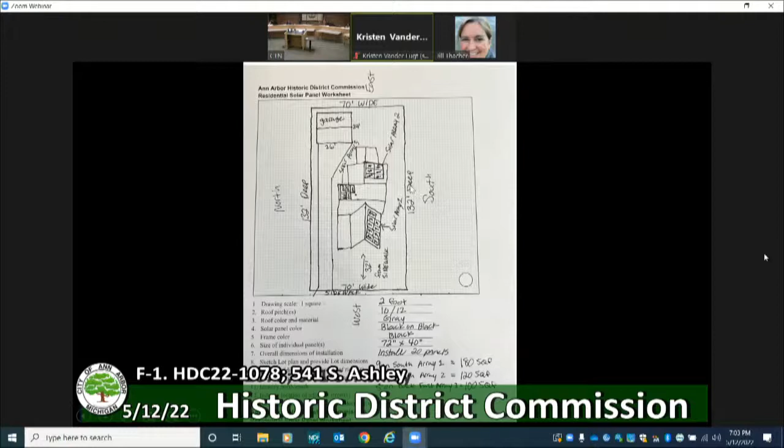Another one is on this shorter sloping roof that we see in the back here. Here's a diagram - that's the shorter one in the back. And then there's a 3rd section on this roof that sheds toward the rear of the yard. They are black-on-black panels, 20 of them total. This is a pretty straightforward application.

From the Secretary of the Interior's standards, number 2 says that the historic character of a property will be retained and preserved. The removal of distinctive materials or alteration of features, spaces, and spatial relationships that characterize a property will be avoided. Number 9 says new additions, exterior alterations, or related new construction shall not destroy historic materials that characterize the property. The new work shall be differentiated from the old and shall be compatible with the massing, size, scale, and architectural features to protect the historic integrity of the property and its environment.

Number 10 says new additions and adjacent or related new construction will be undertaken in such a manner that if removed in the future, the essential form and integrity of the historic property will be unimpaired.

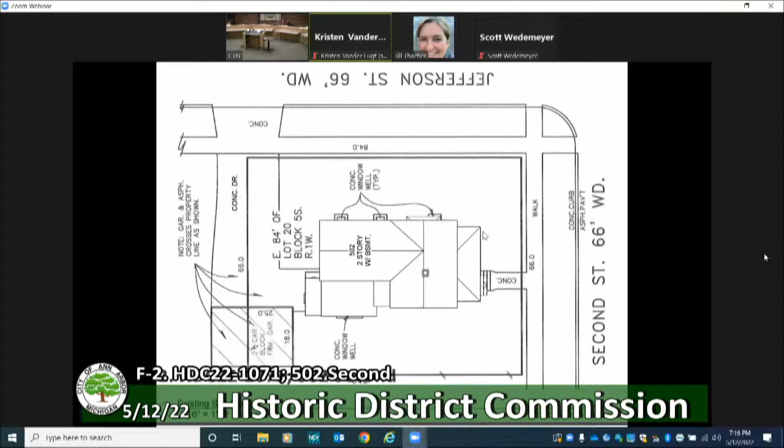That's the existing site plan. The garage is over here. This is where the addition is going to go. There it is.

Existing first floor plan, that will remain unchanged. Here's the existing second floor plan right now. You see that the second floor cuts in here. This is the roof of the one-story wing below.

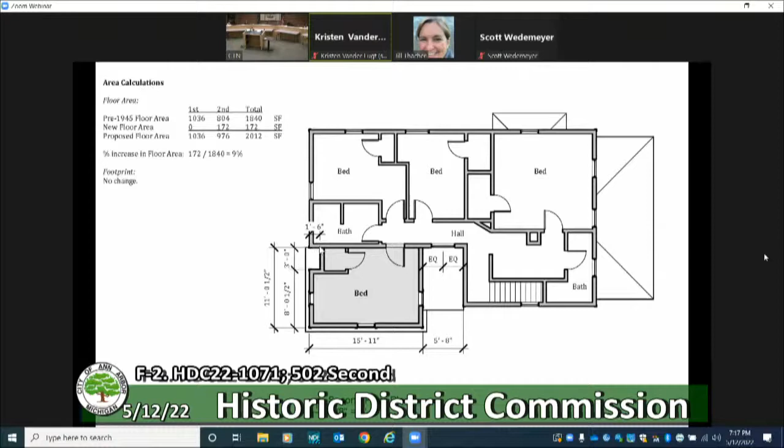And here it is with the addition sitting on top of that one-story wing. Here's that notch I pointed out a minute ago in the rendering that keeps this corner distinct, and it is set in 1.5 feet. Existing roof plan, proposed roof plan on the right, matching the slope of the south gable.

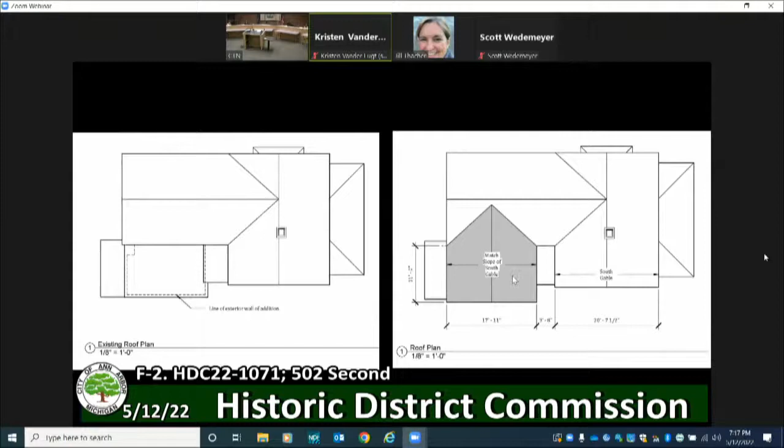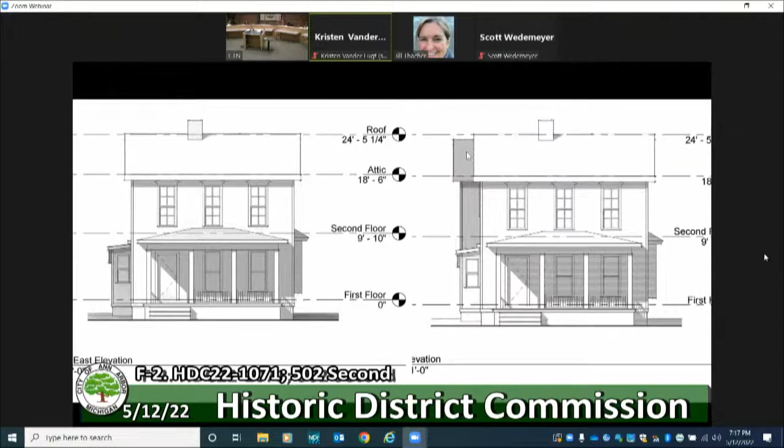Existing on the left, proposed on the right, this piece here is the addition. On the north side, you won't see any changes. On the west side, or rear, here's the addition. It ties in just below the ridge, and is shorter than the highest ridge on the two-story portion of the house right now.

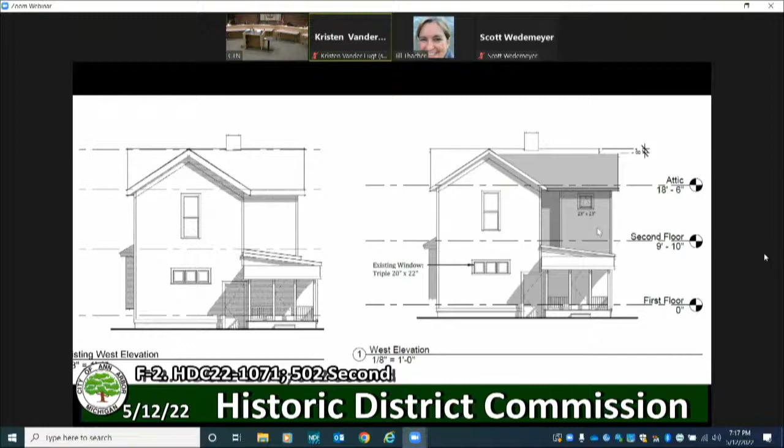And here are those windows. This one's 30 by 60, this one's 32 by 59. Very close, but not an exact match. Here's that historic window that's getting slid over to be centered on the remaining space here.

And the trim that will remain, the roof overhang. There's a lot more information here on materials. This is new, and it's mostly - I can always go back up to this if you want - but it's matching very closely.

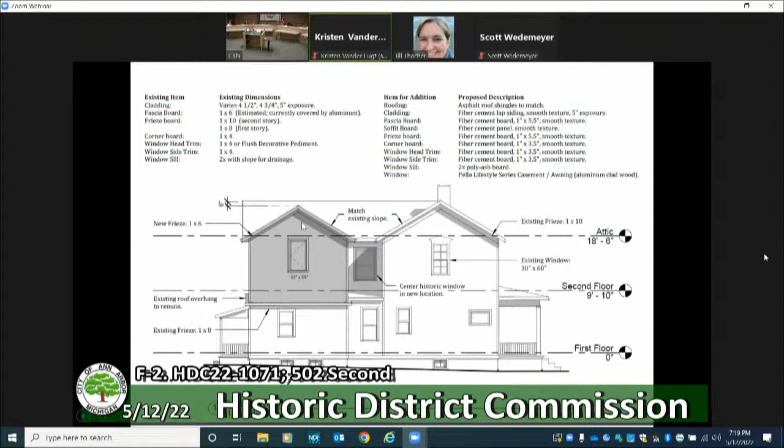Let's see, I want to check and see if these are really matching exactly, or if the fascia is 1 by 6. The new fascia will be 1 by 5.5. Frieze board on the second story is 1 by 10, 1 by 8 on the first story. Frieze will be 1 by 5.5 on the addition. So the dimensions of the trim are shrunk a little bit, which is appreciated because that'll help distinguish it, but it will still be very compatible.

This is a cutaway of the portion of the addition that you can't really see that's in that notch.

I've already read to you numbers 1, 2, 5, 9, and 10. So the Secretary of Interior's guidelines for additions recommend constructing a new addition so that there's the least possible loss of historic materials, so that character-defining features are not obscured, damaged, or destroyed, and considering the attached exterior addition in terms of the new use and the appearance of other buildings in the historic district or neighborhood. Design for the new work may be contemporary or reference design motifs from the historic building.

It's recommended to locate the attached exterior addition at the rear or on an inconspicuous side of a historic building, and limit its size and scale in relationship to the historic building. Also, designing new additions in a manner that makes clear what's historic and what is new. It's not recommended to lose character-defining features or design a new addition so that its size and scale are out of proportion, thus diminishing the historic character.

It's appropriate to place a new addition on a non-character-defining or inconspicuous elevation and limit the size and scale in relationship to the historic property. These are from the Ann Arbor Historic District Design Guidelines. And to place new walls in a different plane from the historic structure, in a subordinate position to the historic fabric.

It's appropriate to limit the size and scale of the addition in relationship to the historic building so it does not diminish or visually overpower the building or the district. The addition's footprint should exceed neither half of the original building's footprint nor half of the original building's total floor area, and I have that in the staff findings. The total increase in floor area is 9%, and in the footprint is 0%. It's not appropriate to design an addition that overpowers or dramatically alters the original building through size or height.

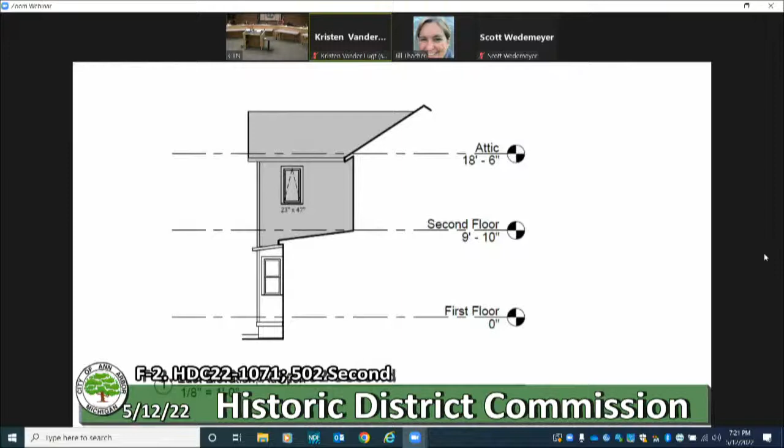All right, let's see. There is one small 1/1 window that would be removed as a result of this.

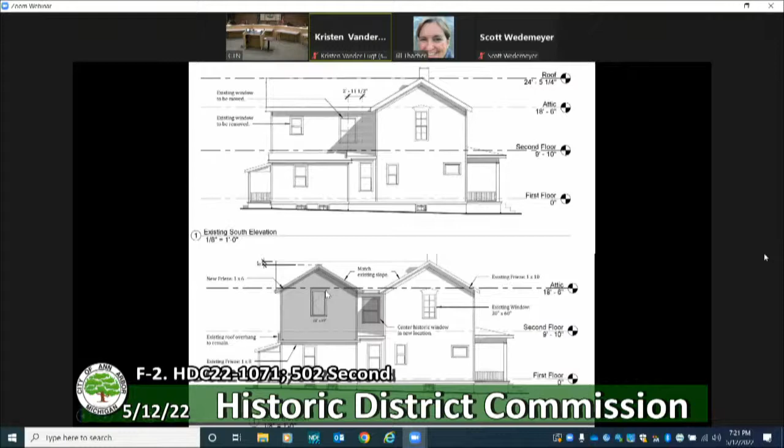In my staff report, I had mentioned that there wasn't a lot of differentiation in the trim and the window sizes. But now that that has been addressed in these new drawings, staff does recommend approval of the application and believes it meets all of the Secretary of the Interior standards and guidelines and the Ann Arbor Historic District Design Guidelines. Thank you.

Commissioner Ross and myself were on the review committee. Commissioner Ross, would you like to give your report?

Certainly, thank you. So just to start off, generally speaking, the house is at an intersection at 2nd and Jefferson. So it's in a highly visible location, but due to the placement and scale of the addition, even though it sits at an intersection, it'll be fairly well concealed.

So we did a walkthrough of the house, talking with the architect and the homeowner. Everything, in my opinion, seemed to make sense in terms of meeting the standards. It's appropriately scaled, and it's in a really good location. The materiality is fine.

Just the one question we had with the original proposal is that the design should make at least a few nods so it's clear this is actually an addition versus an original part of the house, because the siding on the addition is going to be Hardie, and the siding on the home is going to be Hardie as well, so it's going to be all clad in one material.

So generally speaking, the addition was designed so well to fit in that there were some initial questions in the field around how we'd be able to tell that this is actually an addition. It sounds like the architect, after that discussion, made a few tweaks to the design, mostly to the trim and the operation of the windows, and added that little notch to differentiate the addition as new. In my opinion, I think it meets the standards.

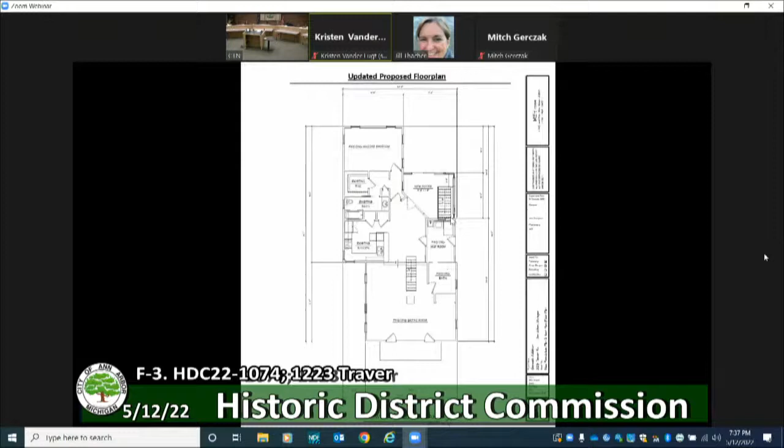Here's the existing notch. This is the existing floor plan. This is the proposed without this wall being inset. I think it was 6 inches or a foot on the original application.

Existing east elevation proposed, you see that the foundation is higher. Here it's very low to the ground. Here it's up 16 inches.

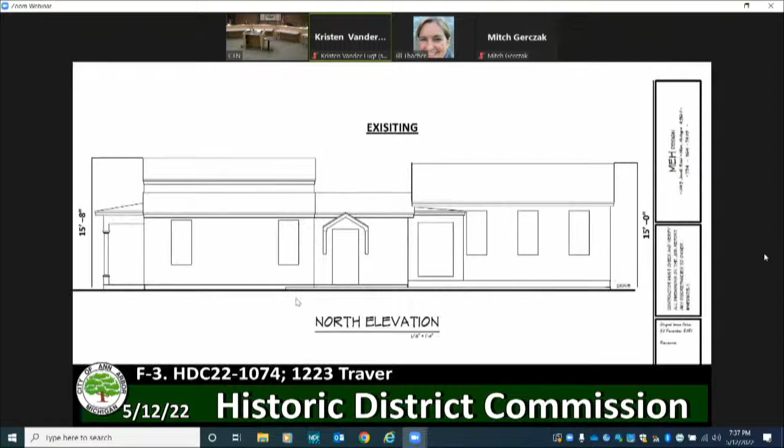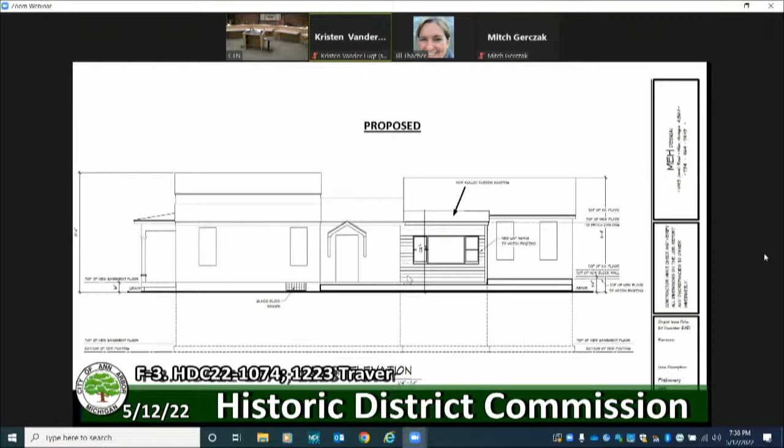Here's the existing north elevation. And here's the proposal. There would still be some differentiation between the roof lines here because this addition is really just a square, and though this wall plane would be the same, there would no longer be a notch here. There would be differentiation in the roof style and height.

This is the back of the house. This is what it would look like from the back. South elevation, there are no changes.

So let me go through the standards, and then I think I have some comments for you. Number 1 says that a property will be used as it was historically or be given a new use that requires minimal change to its distinctive materials, features, spaces, and spatial relationships. I have already read 2, 9, and 10 to you.

Let's see, so from the Secretary of Interior's guidelines, it's recommended to design new additions in a manner that makes clear what is historic and what is new.

From the guidelines for building site, it's recommended to retain the historic relationship between buildings, landscape features, and open space, and to preserve important landscape features, including ongoing maintenance of historic plant material. Also not recommended is locating new construction on the building site where important landscape features will be damaged or destroyed.

From the guidelines for district or neighborhood setting, this is very similar. It's recommended to retain the historic relationship between buildings and landscape features of the setting.

From the Ann Arbor Historic District Design Guidelines for additions, it's appropriate to locate a required addition on the least character-defining elevation, keeping it subordinate, and designing an addition that makes it clear what is historic and what is new. From the Ann Arbor guidelines for landscape features, it's appropriate to retain and maintain mature trees, hedges, and other historic plantings, and to retain the historic relationship between buildings.

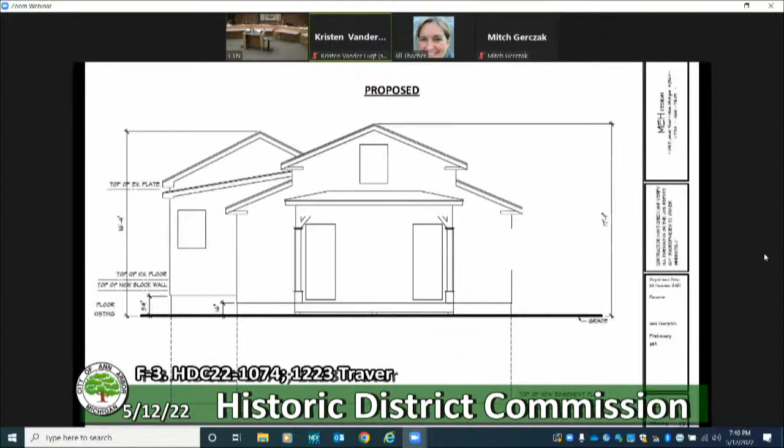One of my staff findings was that if the decision had to be made between moving the house or losing the trees, that would be tough, because it's pretty clear that neither moving the house nor losing the trees is recommended in the guidelines.

The applicants do say that it's possible to leave a crawl space under that portion of the house where the tree's roots have already crept underneath the rear wing. This isn't ideal for them because they're going to lose basement space, and the whole point of this was to get a larger finished basement out of the work that they want to do.

But leaving a partial crawl space along that south wall would leave the tree roots undisturbed, and would be in keeping with both the standards and both sets of guidelines.

For the revision to the addition, I'm a little bit wishy-washy about this one, because you can kind of see it a couple of different ways. This addition that you see in the back here was from the period of significance. The new addition that was inset a little bit is in roughly the same footprint as that, so that is something I think should be maintained.

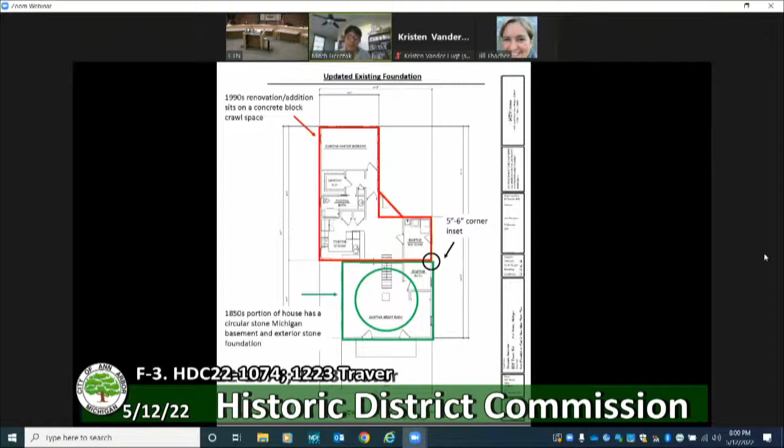Thank you, I had the same question actually, that's the first thing I thought of. That might be tricky for a number of reasons - I don't know if you can tell that we have some stairs, grandfather stairs that connect the old portion and the new portion. Yeah, it'd be quite a... that might be more than we could afford.

I think I'm good. You're all good? Okay.

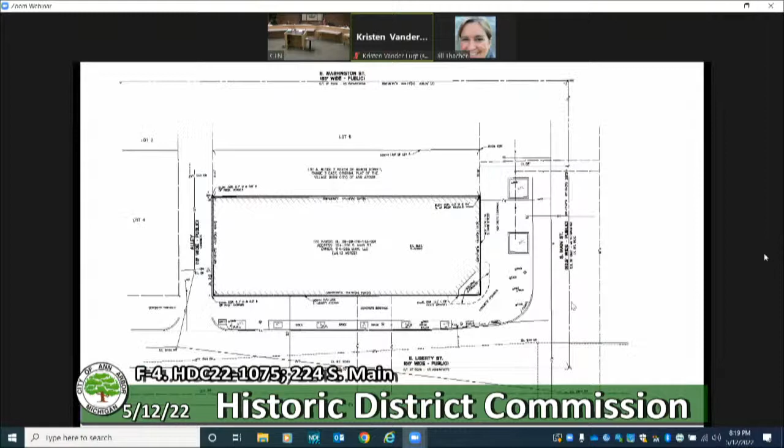These openings are maintained, as are the openings in the front and the front doors and the trim there. Site plan is a rectangle.

That's pretty straightforward. Existing first floor plans, I'm not going to dwell on the floor plans, but they're here if we need to talk to them. There's a stairwell and an elevator proposed

to be placed inside of the Main Street storefront, which has been revised. I'll show you that in a second. And then we have our second and third floors and the fourth floor here, which is the partial floor.

And then it looks like there's a mechanical screen on top of that with some mechanical units. We have elevation drawings. Here's 224 South Main Street, which has a new storefront in it.

All of this remains, and panels would be replaced here. And then overhead, we have the new building and glazing, and here you can see that fourth floor that's set back.

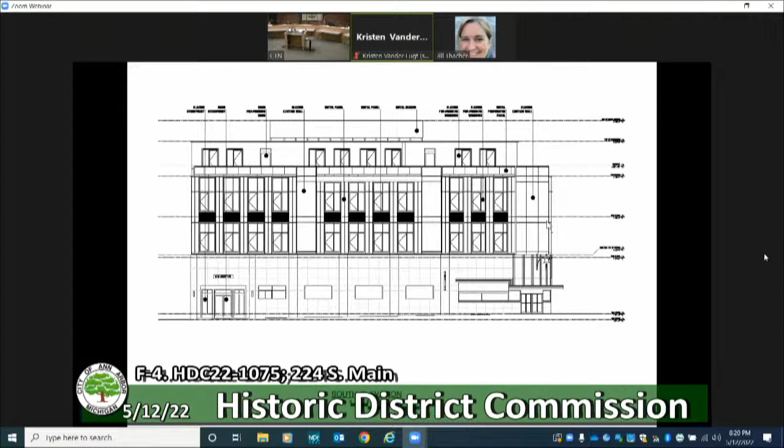The south elevation and the view from the back from the alley, which you actually wouldn't see because there are buildings in the way, but you might get a little bit of this on an angle. Existing materials have been laid out very nicely in the application, and proposed materials include the steel panels.

This is the new storefront on Liberty, and we have a new storefront on Main at 224. There's information on the metal panels and window frames.

Here's the metal cladding plan for the first floor for the Cunningham section. They, in some detail, drew over the historic photographs to figure out what the panel pattern would be, and then to replicate it with modern panels.

Obviously, it's going to be a little bit different around these windows, but really, that alone would just do wonders to restore the historic appearance of this building.

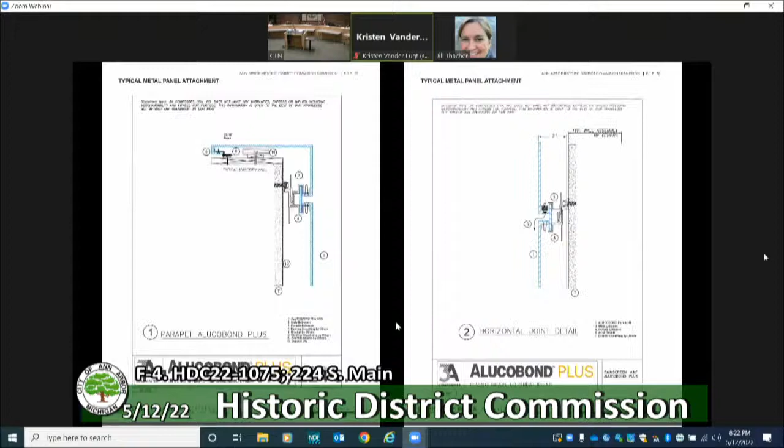There's a lot of information on attachments of panels. We're not going to go through in detail, but I can flip back to them if you want to see them.

Here we have the new storefront on Liberty that is proposed, and the new storefront on Main Street that is proposed. I touched on this earlier, but since this is a contributing architectural feature from the period of significance, I don't

think that it is appropriate to replace this storefront with a shallower one. I realize that this is very deep and takes up a lot of floor area on the inside, but that is the historic character, to have these very large 40s display windows.

There aren't a whole lot of these left on Main Street. I can only think of two. Window cut sheets were included.

All right, let me run through the standards and guidelines. I read to you 1, 2, I didn't read 3. Each property will be recognized as a physical record of its time, place, and use. Changes that create a false sense of historical development, such as adding conjectural features or elements from other historic properties, will not be undertaken. 4 says that changes to a property that have acquired historic significance in their own right

will be retained and preserved. I have read to you 5. 6 says deteriorated historic features will be repaired rather than replaced.

Where the severity of deterioration requires replacement of a distinctive feature, the new feature will match the old in design, color, texture, and where possible, materials. Replacement of missing features will be substantiated by documentary and physical evidence. And I have read 9 and 10 to you.

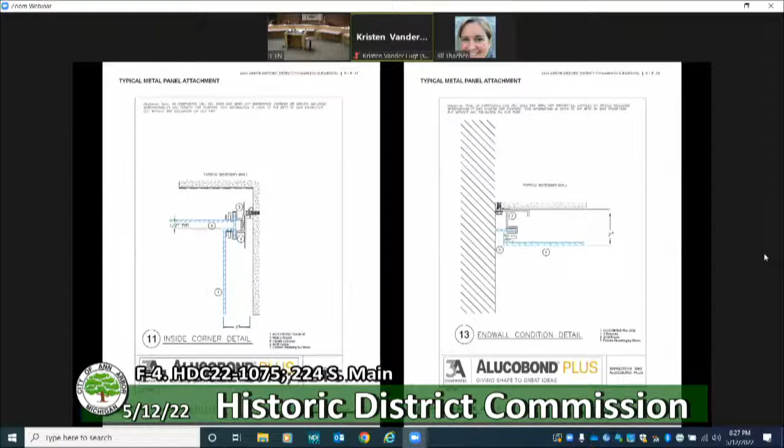Let me cruise all the way back up here again. Okay, yeah, these are good.

Just to be clear, the one-story building on the site now is from the period of significance for Ann Arbor's historic districts, and it does retain its integrity from that time. It's therefore a contributing historic structure, and its character, materials, and architectural features must be maintained. It's a unique example of art moderne architecture in Ann Arbor, of which there are few remaining examples.

No changes are proposed to the corner storefront and main entry, which is appreciated. No changes are proposed to the footprint of the building. The current floor area is 5,304 square feet, and the proposed floor area is 13,500, an increase in floor area of 254%. I've already gone through the Preservation Brief 14 information.

So while the work to the exterior of the historic building is commendable, staff believes the building addition and the replacement storefront at 224 South Main are incompatible with the existing building, based on the Secretary of the Interior standards and guidelines and guidance offered by the National Park Service in Preservation Brief 14 for additions. Thank you.

Thank you, Ms. Thatcher. Commissioners Ross and myself were on the review committee. Commissioner Ross, did you want to start, or do you want me to? Certainly, thank you. So, yeah, I basically agree with the staff report.

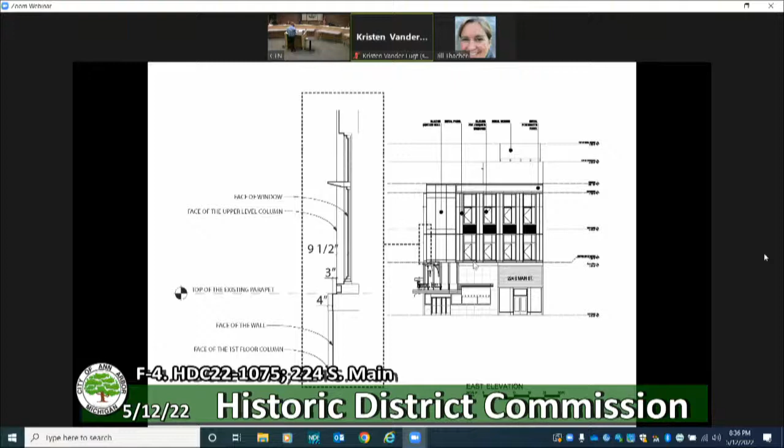The second floor plane will be constructed above the existing roof, and above the original second floor that the current roof is constructed above. So the building would be able to be removed and restore the height and scale to this one-story portion in the future, without compromising anything whatsoever.

Yeah, I don't know. I think that might be the extent of what I wanted to point out based on the staff report, and I'm here to answer any questions.

I did see in the staff report a question about how we're going to adhere the panels to the brick, and if we would go into the mortar joints. We would go into the mortar joints. We've attached furring strips into those mortar joints to preserve the brick faces and then apply the metal panel to those furring strips.

So I'm here to answer more questions. Do I sit down now? Do I stand up? You can stay there.

Let me get my notes, okay, I have a few questions here, David. But I guess just the first one, can you explain the program, if it's known, of what people will be accessing in the Liberty storefront and then also the Main Street storefront?

The Main Street storefront is currently planned to be the access for the upper stories, whether those be commercial or residential. We are looking at the two full floors as commercial and potentially that upper fourth floor as partial residential that would have access to the roof. The elevator would allow the businesses or commercial uses to also have a private patio space up there.

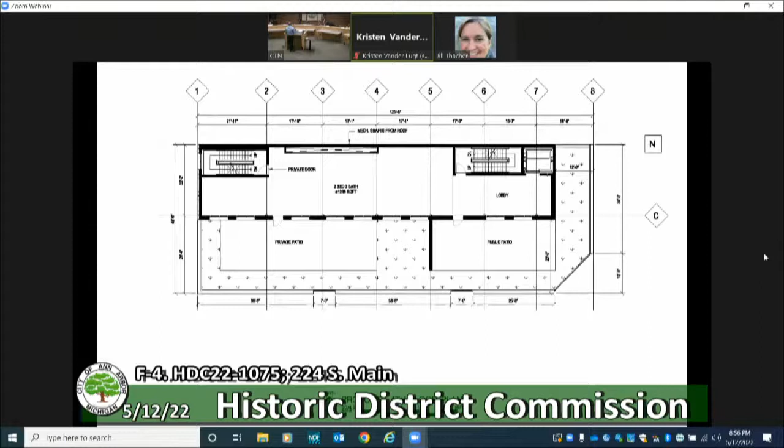If I can just ask for some clarification - you're referring to working session 3? Yeah, because I believe, and I was not present for one of the working sessions, I had a prior engagement, so another person from my office was here at that presentation, but the request was made from the planning, or from the HDC Commission, to restore the 45 that we had shown from working session 2. So that was, I think it was a question about why it was like that, and in the other one, maybe it was more compatible or not, but I think it was a question about why there was a change.

And for me, I think that angle, the way it's depicted today on the proposed design, is competing a little bit more, especially reading in the full plane. Okay, and maybe it's just that view that was chosen to be displayed.

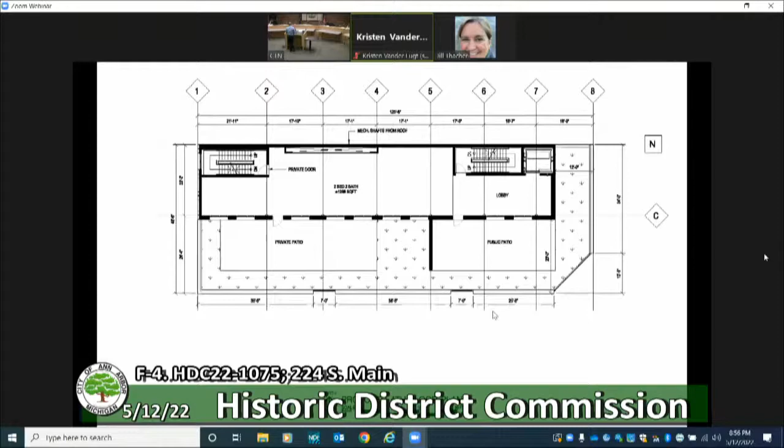I mean, that was the first session. Then we kept moving the goalposts until we had this one, which is the fourth rendition. And now we kind of moved the target, saying that now you want it to be a single story.

I'm not saying I want it to be a single story. I'm saying I think in that 1939, it was a single story. Right, but we've been looking at 3 stories from day one on these work sessions. And I mean, it's one of those things that you look back in time, and in significance that we have is 1939, as you're saying.